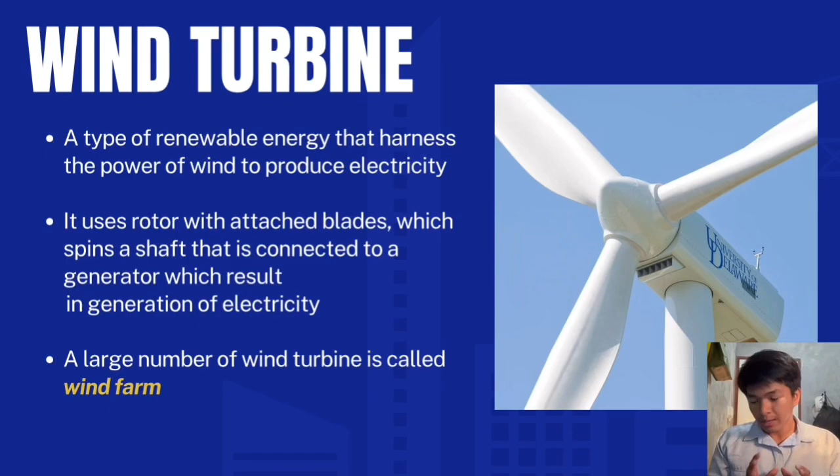When many wind turbines are installed in one area, it is called a wind farm. Wind farms are usually located in places with strong and consistent winds, such as coastal areas, yung mga offshore, mga mountain areas, and lalo na sa mga open plains. Kasi syempre, yung mga wind turbines, sobrang laki nun, kailangan dapat open space siya. Syempre, pag sobrang mas mataas, mas mahangin.

The blades are the most visible part of the wind turbine, yun nakikita natin sa harap, yung tatlong umiikot, tatlong blades. They rotate when the wind hits them. Kapag may hangin na dumaan, ang mga blades, magro-rotate siya clockwise. So the blades are connected to the hub.

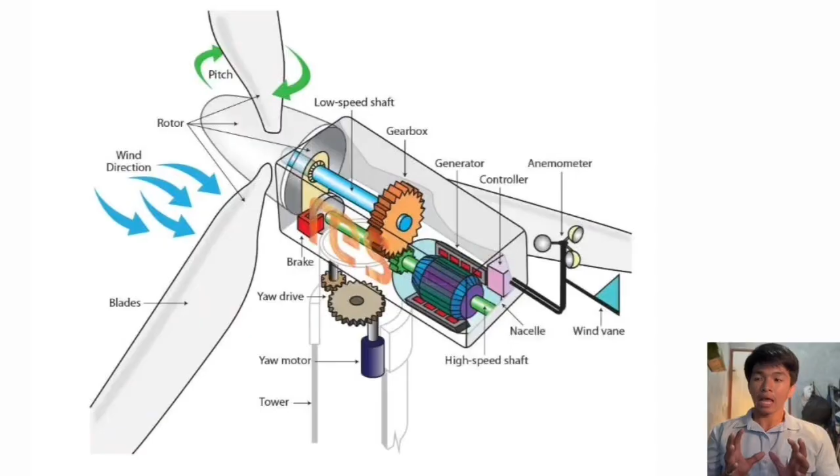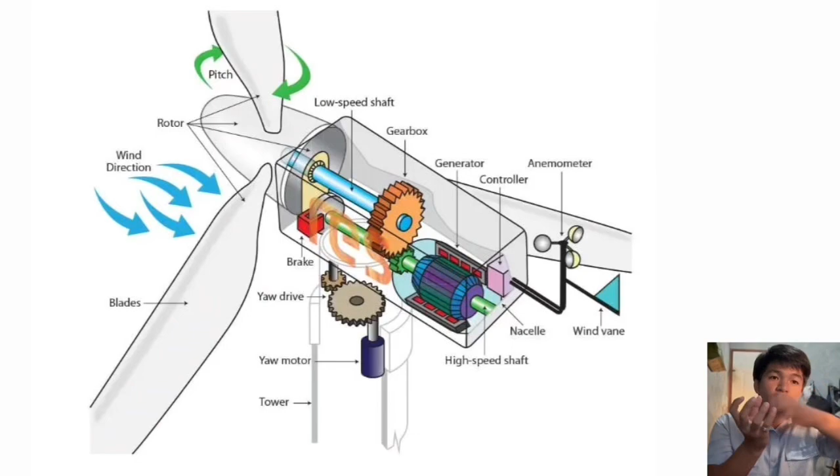The hub is connected to a low-speed shaft. Ang low-speed shaft, it connects to the gearbox, and the gearbox increases the rotational speed before sending it to the generator. Kaya mapapansin natin, kapag ang pag-ikot ng blades, mabagal, paano siya makapag-produce ng electricity kung ganun kabagal? So meron tayong gearbox, yun yung nagpapabilis ng rotation, tapos magkoconnect siya sa high-speed shaft, yun yung umiikot na mabilis, mapunta sa generator.

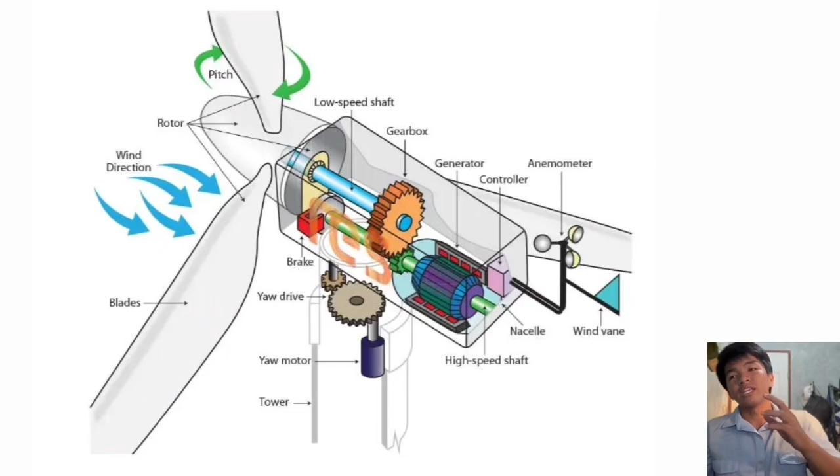Ngayon, yung generator, makapag-produce siya ng enough electricity na mapupunta sa kung saan ini-store yung electricity natin. Once the generator rotates, electricity is produced. Most modern wind turbines have 3 blades because this design is the ideal. Kasi kapag less than 3 or more than 3, magkakaroon siya ng faulty, hindi siya efficient. So ang 3 blades na design ay nagbibigay ng maximum efficiency and stability.

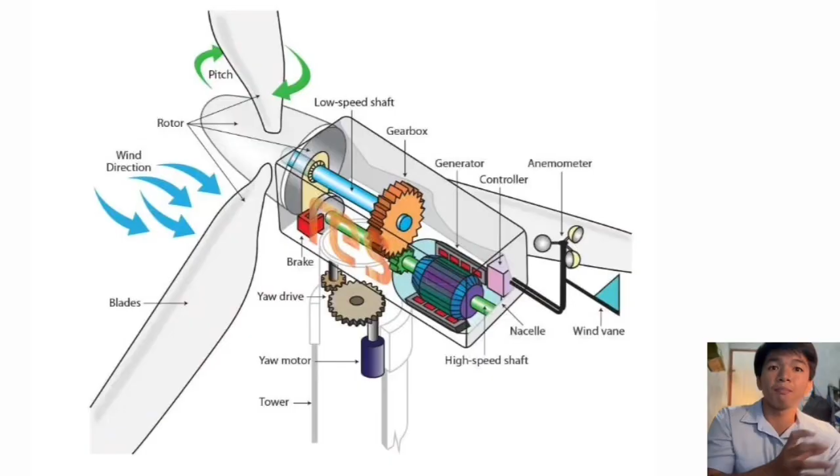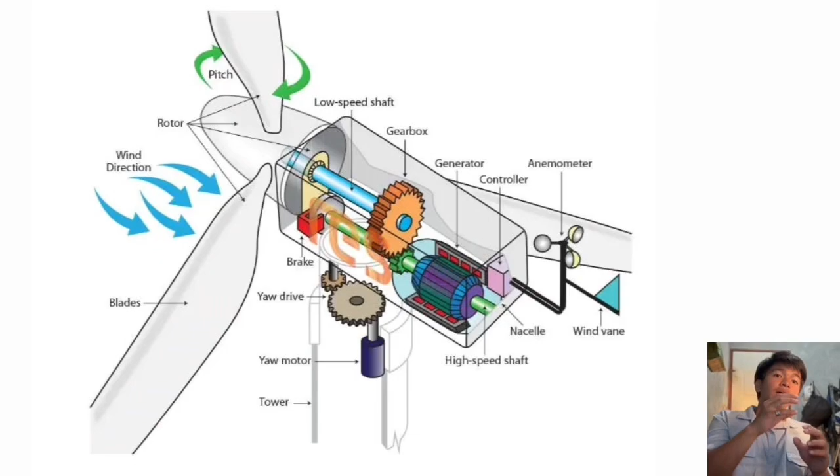So mamaya madidiscuss natin kung bakit 3 blades lang. Pangalawa, yung hub naman. Makikita natin dito, ang hub nagko-connect siya sa blades hanggang sa shaft. It transfers the rotational motion from the blades to the low-speed shaft, papunta sa gearbox.

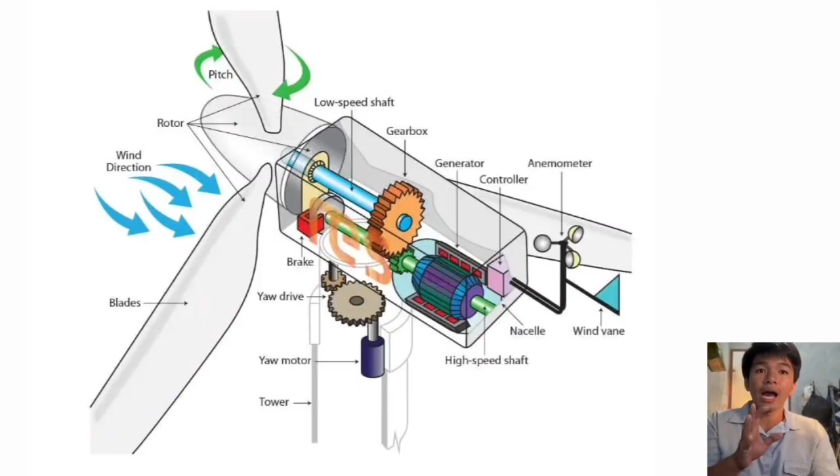Pangatlo is low-speed shaft. This shaft rotates slowly, usually around 10 to 30 revolutions per minute. It carries the mechanical energy from the blades to the gearbox. Alam nyo ba, sa isang ikot ng wind turbine blades, yung umiikot sa loob ng gearbox ay naka 90 na ikot. Isipin nyo kung gaano kabilis, kaya nakakapag-produce siya ng electricity dahil doon sa gearbox.

Ang gearbox naman, it increases the speed of rotation. Wind turbines need high rotational speed for the generator to produce electricity efficiently. Kasi kung mabagal yung pag-ikot, wala maproproduce na electricity. Kaya yun yung purpose ng gearbox, it increases the speed of the rotation para makapag-produce siya ng enough electricity.

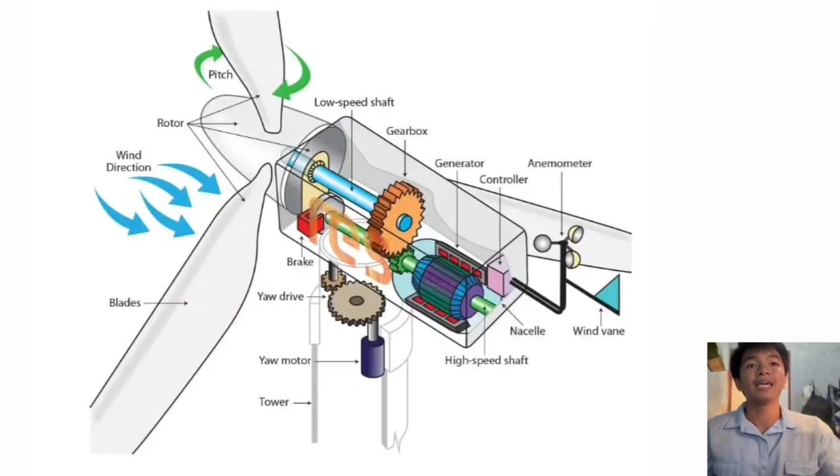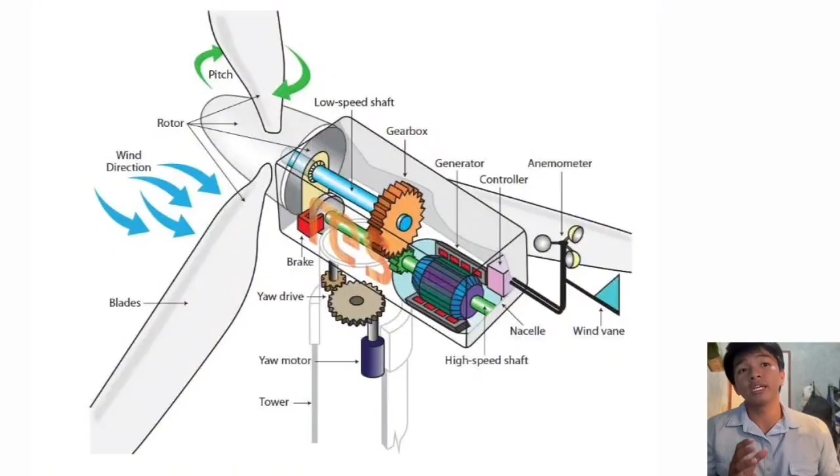Dadako naman tayo sa generator. Ito yung pinaka main component ng wind turbine, kasi kung wala yung generator, hindi siya makakapag-convert from mechanical energy into electrical energy, hindi siya makakapag-produce ng electricity. This is similar to how generator works in power plants.

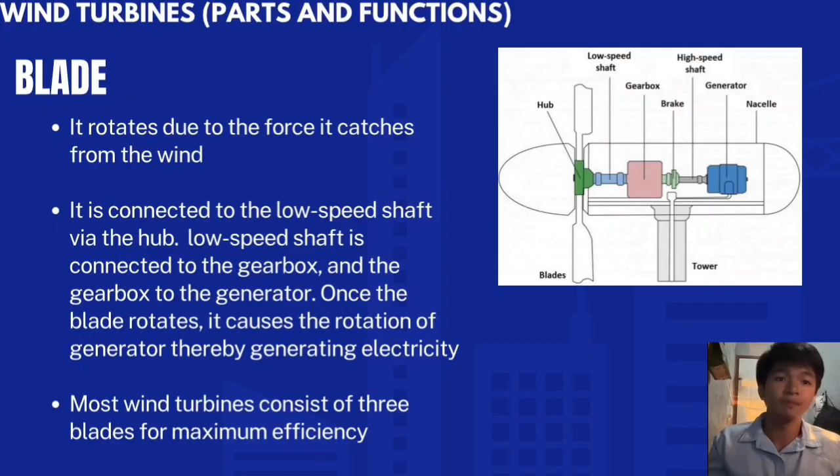Dito naman po, next ay the low speed shaft is connected to the gearbox and the gearbox is connected to the generator. Once the blade rotates, it causes the rotation of the generator, thereby generating electricity.

Basahin muna natin ang blade design. Una, it is to produce an amount of power, wind turbine blades generally need to be large and tall. Pangalawa, it is shaped to generate maximum power from the wind at the minimum cost. Pangatlo, improvements in the design has produced new wind turbines which are more compact, quieter, and generates more power from less wind.

Pang-apat, its length can vary around 50 meters to 107 meters. Currently, the longest is from Siemens Gamesa.

Wind turbines are very important sa atin. Wind turbine blades pala are very important because their design affects how much power the wind turbine can produce. Now, it is to generate more power. Ang wind turbine blades are generally large and tall.

Ngayon, tatandaan natin ito, i-take note natin, kapag mas malaki, mas mataas yung height, mas malaki yung maproproduce na power. Bakit kaya? Kasi mas mataas yung altitude, mas malakas yung hangin na matatanggap ng blades, which magiging more faster rotation dahil sa pressure na binibigay ng air.

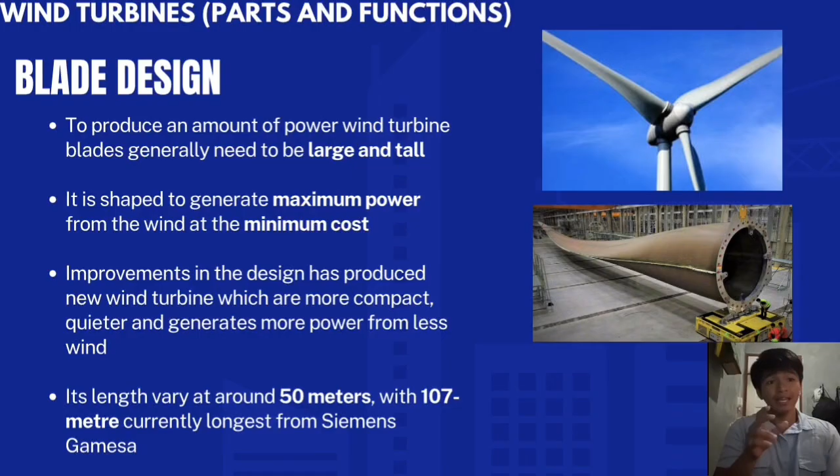Dadako naman tayo sa airfoil shape. Ang blade design nito, it is the cross-sectional shape of the blade that determines its aerodynamics. This airfoil design allows the blade tips of a wind turbine to move faster than the wind is moving, thus generating more power and higher efficiency.

Makikita natin dito sa slide na ito kung ano yung itsura ng airfoils. It is the cross-sectional shape ng blade, yung area mismo niya, yun yung tinatawag nating airfoil. The airfoil design allows the blade tips to move faster than the wind, which increases efficiency and power generation.

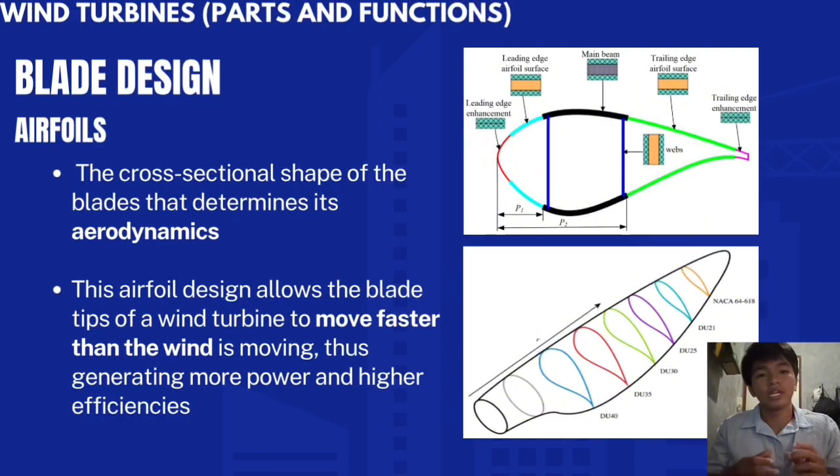Dito papasok na ang aerodynamics. Makikita natin dito yung mga each design, mga types ng design ng airfoils. Makikita natin, thick airfoil family for large blades and thin airfoil family for medium blades. Tingnan nyo na lang kung ano yung mga itsura ng mga designs ng ating mga wind blades.

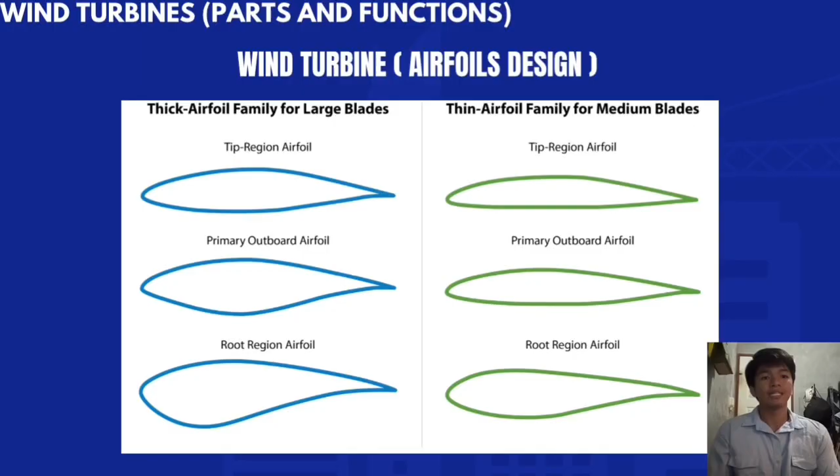Blade aerodynamics. Wind turbine blades work by generating two aerodynamic forces, the lift and drag. This is due to the wind and their airfoils. Ang explain ko na lang sa inyo, ang lift force is perpendicular siya sa air, kumbaga pataas siya.

Yung air, pataas siya. Ngayon, it is in line with the blade rotation. Kapag kung saan umiikot yung blade, doon ang lift force. Kaya nga yung lift force, umaangat siya. Ngayon, yung drag force naman, yun yung nasa ilalim, yun yung parang dinradrag niya yung blade pataas.

It is in line with the apparent wind direction, which is in opposition of the blade's motion, and the drag increases in proportion to the frontal area of an object facing the wind.

So i-explain ulit natin. Ano muna ang lift force? Ang lift force nga raw ang nagpapaangat. It is perpendicular nga sa wind direction kung saan umiikot ang blade, or ito ang force na nagpapaikot sa blade, nagpapaangat.

So ang drag force naman is parallel to the wind direction. Yun yung nagdradrag, and it opposes the motion of the blade. Ngayon may tip ako sa inyo, kung kayo sa wind turbines, the more lift na na-increase siya, mas maganda yung magiging resulta.

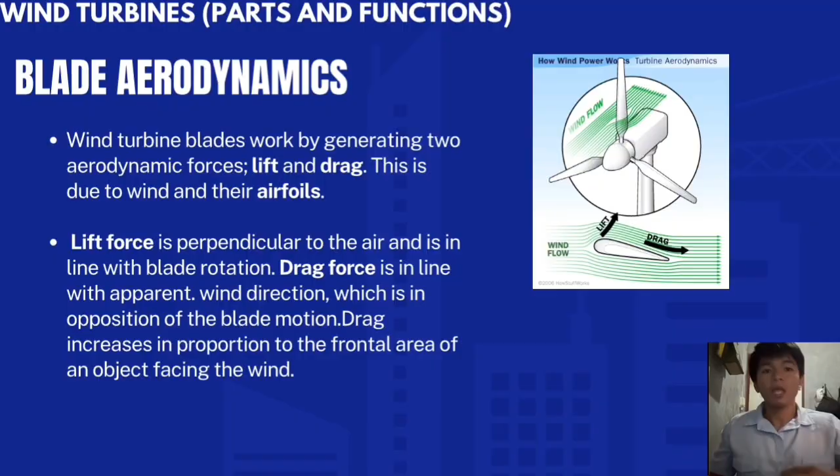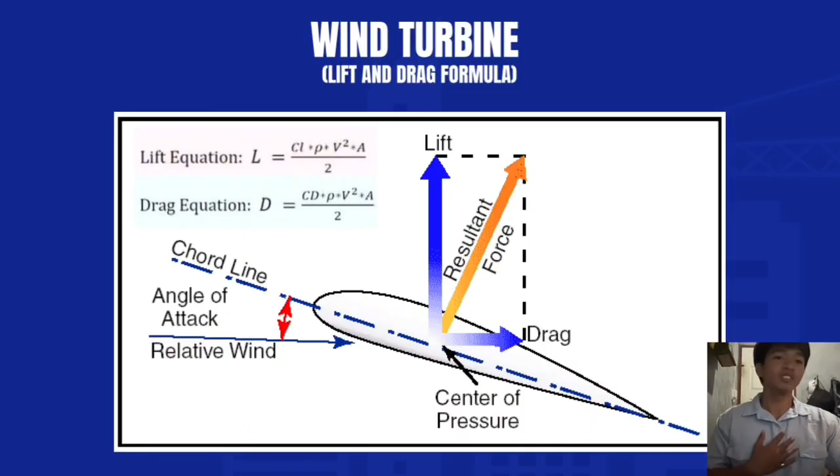So these formulas can help future engineers to design blades that produce maximum energy. So makikita dito natin sa slide na to, the blade aerodynamics. So ayun nga, may makikita kayong pa-curve and sa pataas na ganon. So may tinatawag tayong ganon sa aerodynamics.

So another thing that the airfoil or the design is able to bring is for the blade to attain a difference in pressure. Makikita natin in both sides. May pagkakaibang pressure kasi magkaiba yung curve nila.

So may tip lang ako sa inyo dito. Kung ano ang mas ma-curve, yun yung low pressure. Kung ano ang less curve na area, yun yung high pressure. Yun yung nagli-lift na force, paangat. So the difference in pressure on both sides.

So the most curved side nga, or we say the convex side, generates low air pressure, while the high pressure air pushes on the less curved side, or the side that is slightly concave part, or paganire, this is actually the reason kung bakit nagro-rotate yung blades natin, kung bakit nagkakaroon ng conversion ng electricity. So makikita natin yung pressure difference nila.

Kaya para mag-rotate ang isang blade pala, kailangan pala yung magkaiba yung curve nila para magkaiba yung pressure nila. So para mag-rotate yung blades natin para magkaroon ng electricity, para magkaroon ng maximum efficiency nga. So that's how, alam nyo ba, yung mga aeroplano, ganun din. Paano siya gumagana? That's how airplanes work. So ayun lang ang ating madiscuss.

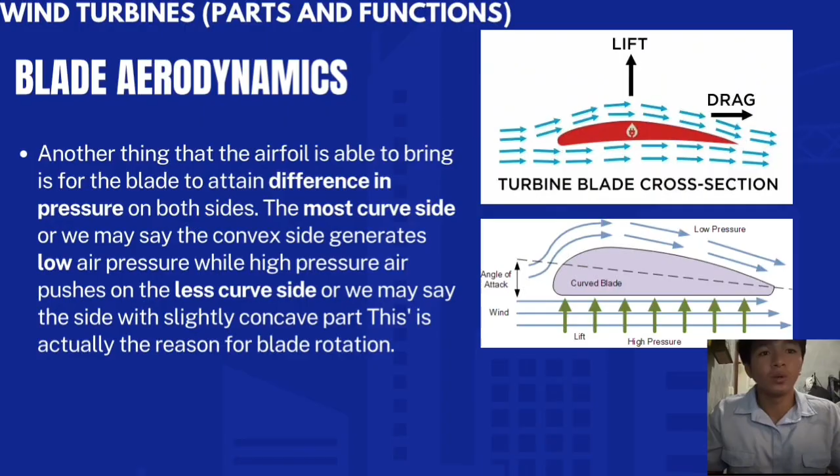Dito ipinapakita ang role ng leading edge and trailing edge sa kung papaano ito nakakatulong sa pag-ikot ng blades. So ang una ay ang leading edge. The leading edge is the front part of the blade. Kumbaga, ito yung may direct contact sa air, kung saan ang air ang nagpupush dito upang umikot ang isang blade. And also, it plays an important role in guiding the airflow smoothly over the surface of the blade.

And next naman is the trailing edge, kung saan ito ang rear portion of the blade where the airflow exits after passing over the blade.

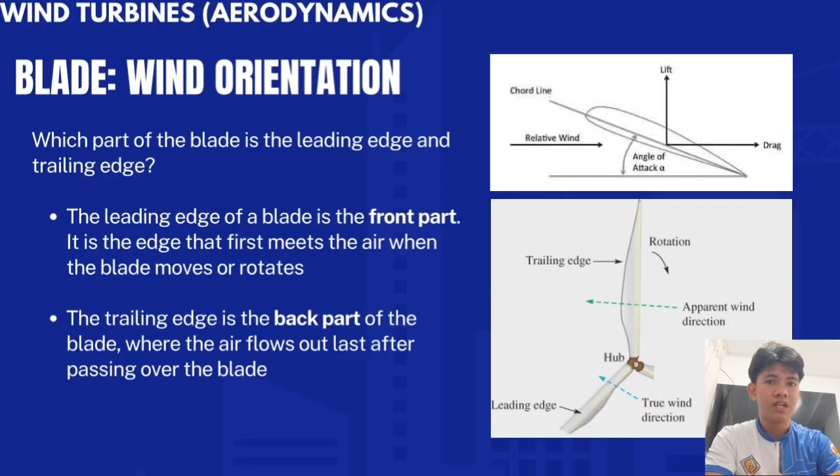Its shape helps control how the air leaves the blade, which affects efficiency and overall performance. So dito ipapakita kung ano nga ba ang rotation ng isang wind turbine. Tinutulak ba siya sa part na may mas maliit ang curve or sa part na may mas malaking curve? So, ang rotation ng blade ay patungo sa kung saan may mas maliit ang curve.

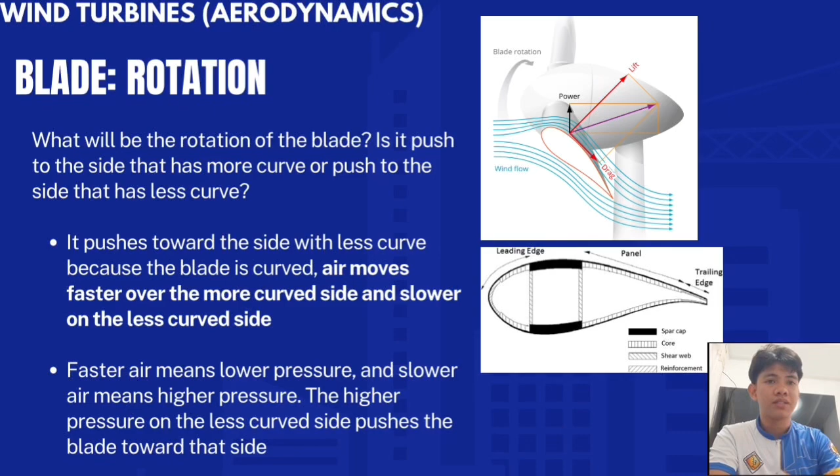This happens because the blades is shaped with one side more curved than the other side. Air moves faster over the more curved side, creating lower pressure, while air moves slower on the less curved side, creating high pressure. And yung pressure difference na yung nagpo-produce ng lift, which causes the blade to rotate patungo sa side na may less curve. So, kung ating titingnan sa front view, makikita natin dito na pa-clockwise ang rotation ng wind turbine.

Additionally, the blade's design is twisted and tapered along its length to improve aerodynamics. The twisting adjusts the angle of attack at different points of the blade, optimizing airflow and increasing lift. The tapering reduces the blade's thickness towards the tip, which helps reduce the drag.

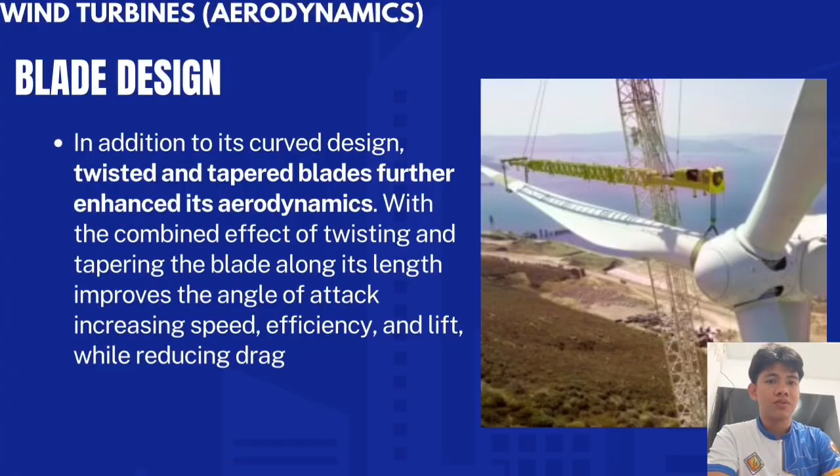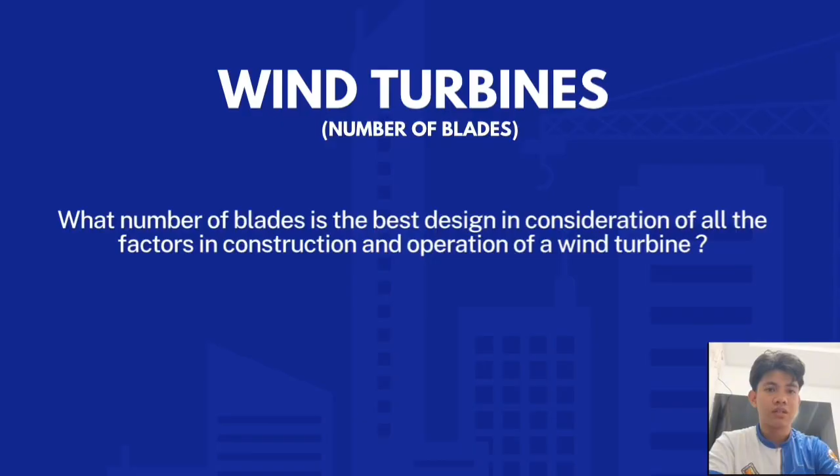So, let's proceed naman po dito sa kung ano nga bang dami ng blade ang mas maganda. Isa ba, dalawa, or tatlong blades, or mas marami pang blades ang mas maganda sa pag-operate ng isang wind turbine? Sabi dito, the fewer the blades, the better. Kapag mas kaunti ang blades, mas mababa ang drag dahil mas kaunti ang surface area na humaharang sa airflow habang umiikot ang blades. Dahil dito, mas mabilis ang pag-ikot ng turbine.

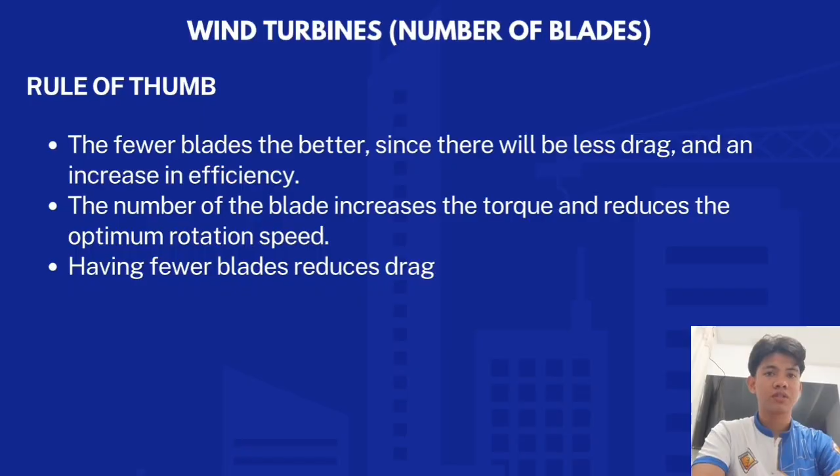However, fewer blades also produce less torque, which means the turbine generates less twisting force. Kapag marami naman ang blades, tumataas ang torque, pero dumadami ang drag. Kaya bumabagal ang pag-ikot at maaaring bumaba ang efficiency. Kaya pinagbabalanse ng mga designer ang bilang ng blades to optimize both torque and rotation speed for the best performance.

While having only one blade would reduce the drag and potentially maximize energy captured because there's less resistance, it creates a serious problem: the turbine becomes unbalanced. With just one blade, the forces acting on the turbine are uneven, causing vibrations and mechanical stress. Kaya kahit may advantage sa drag, kasi nga sabi, because the fewer blades, the lesser drag, hindi pa rin practical ang paggamit ng isang blade dahil kinakailangan nito ng matibay at matatag na turbine habang umiikot. Kaya mas pinipili ng designer na gumamit ng mas maraming blade para sa balance.

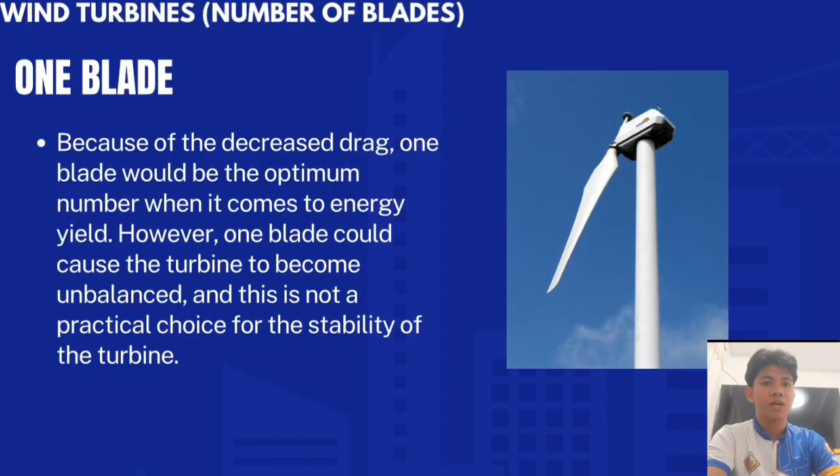At yun, example is 3 blades, di ba, na may maintain nito yung balance and na-ensure yung smooth and reliable performance. So, dito sa 2 blades, masasabi natin na balance ito.

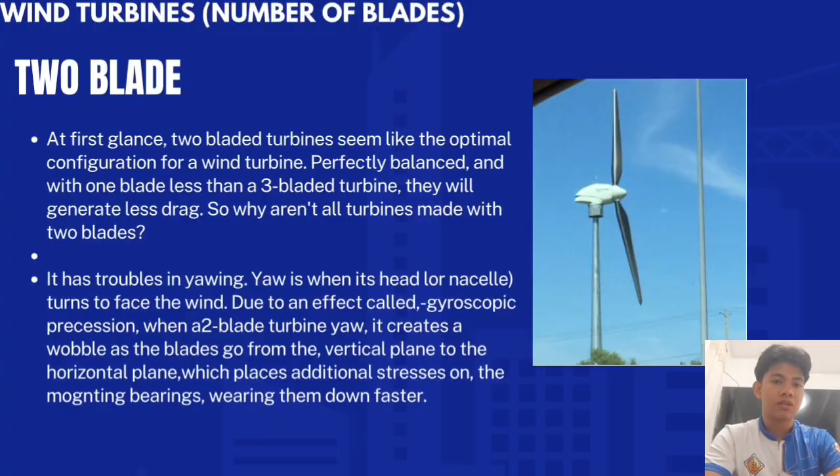Pero dito, nagiging problema ay ang yawing. Ano nga ba ang yawing? Ang yawing ay ang pag-ikot ng nacelle para ito ay tumututok sa direction ng hangin. At ito ay tinatawag din na gyroscopic precession, na kapag ang dalawang blade ay nag-yaw, nagkakaroon ng panginginig, at ito yung nagdudulot, nagiging sanhi ng stress sa bearing. Kaya ito rin yung nagkakausa ng mabilis na pagkasira ng isang turbine. Kaya hindi rin ito recommended ng mga designer.

Having more than 3 blades increases the total surface area that pushes against the wind, which causes greater wind resistance. This extra drag slows down the turbine's rotation, reducing the efficiency of electricity generation. So kumbaga, pag mas maraming blades na nakalagay sa isang turbine, mas napapabagal nito yung pag-ikot ng turbine, dahil na rin sa malaking area na pwedeng pagtulakan ng hangin.

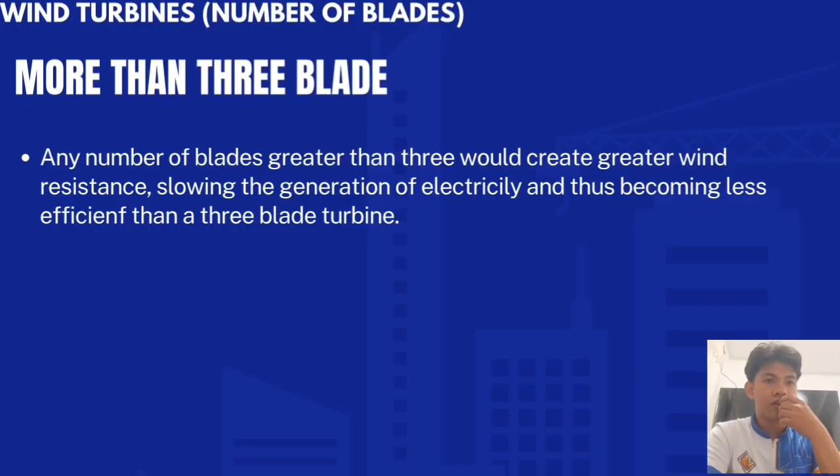So 3 blades strike the best balance because they provide enough surface area to capture wind energy efficiently while keeping drag low enough to maintain a good rotational speed. This combination results in smooth operation, stable balance, and optimal power output, making three blades the most efficient and practical choice for large wind turbines.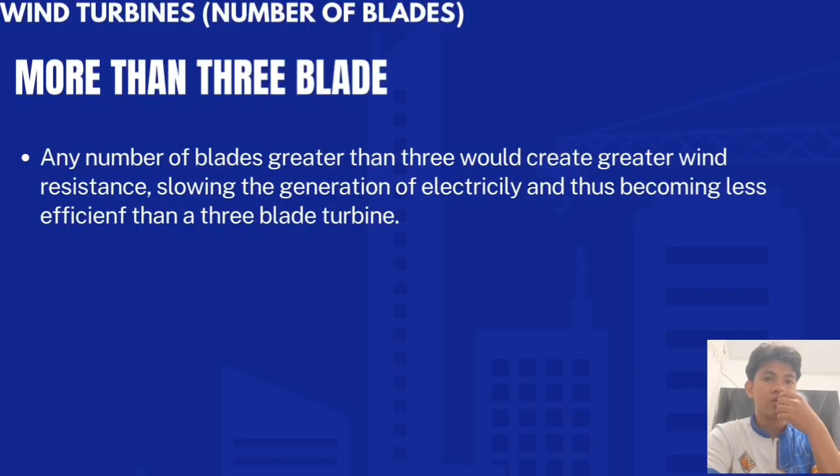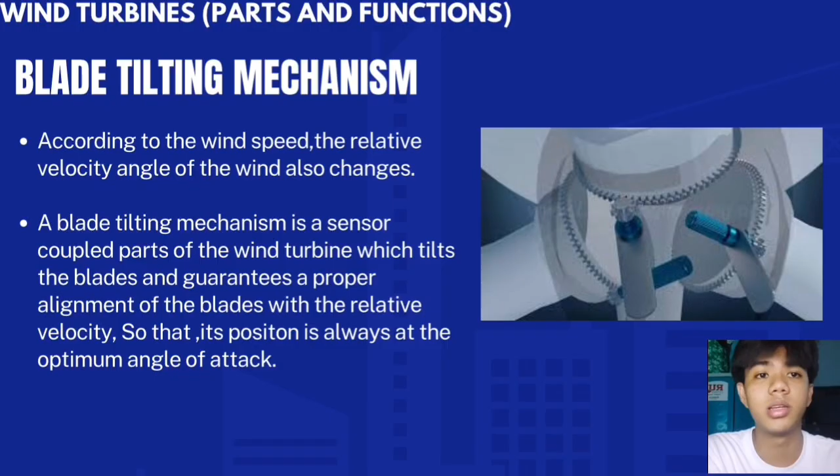Ang susunod na parts ng wind turbines ay yung nacelle. Base dito sa picture, makikita nyo yung nacelle sa may likod ng blade, yung may nakasulat na Siemens. Minsan ito ay tinatawag na housing, kasi nagko-contain ito ng mga slow speed shaft, high speed shaft, gearbox, generator, at mga iba pang maliliit na parts sa loob nito.

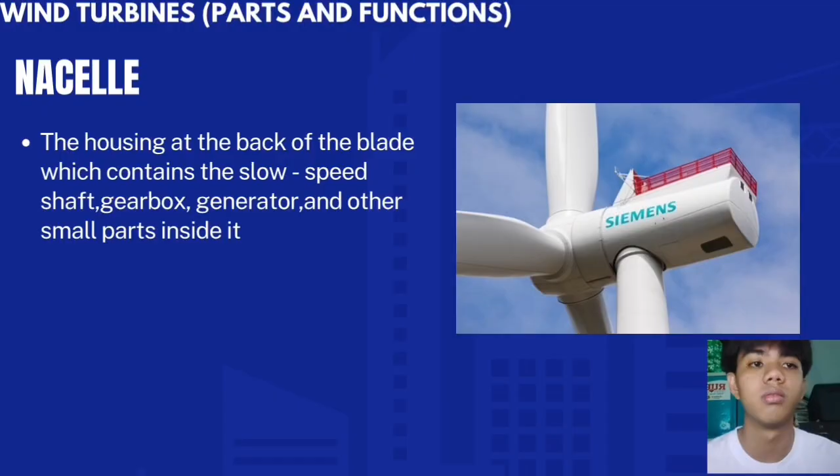Next naman ay yung gearbox. Ano nga ba yung function nito? Ang gearbox ang nagpapabilis sa mabagal na pag-ikot ng wind turbine tungo sa mas mataas na bilis na kailangan ng isang generator para makapag-produce ito ng kuryente. Sa pamamagitan ng mga gears, pinapataas ang RPM mula sa low speed shaft patungo sa high speed shaft ng generator. Dahil doon, ang generator ay umiikot sa tamang bilis at nakakapag-produce ito ng electricity.

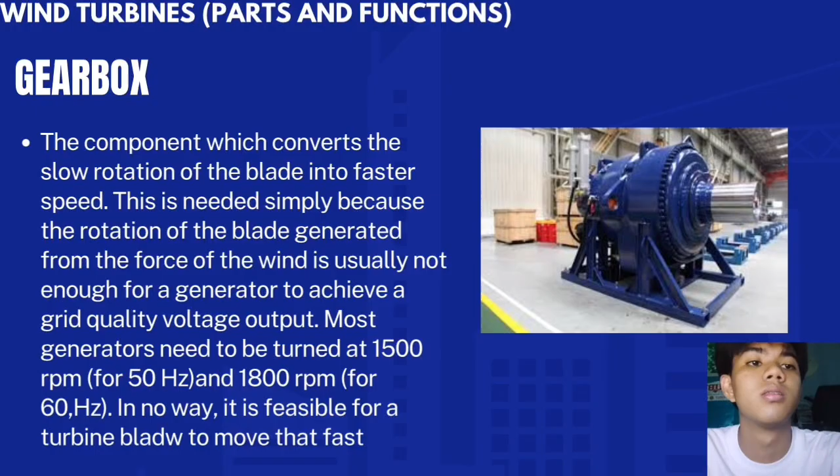Ang common ratio ng isang gearbox ay about 90:1 with a rate of 16.7 RPM input from the rotor to 1,500 output RPM for the generator. Ang ibig sabihin ng ratio na 90:1, sa kada isang ikot ng blade, 90 beses ang ikot ng isang gearbox.

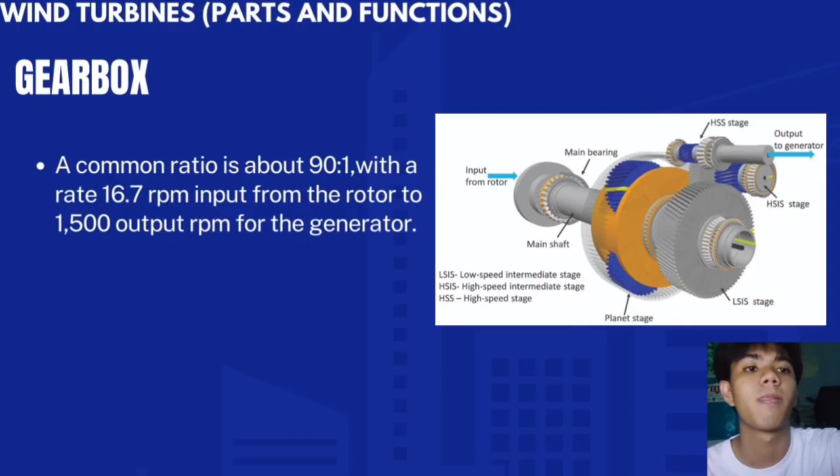Ngayon proceed tayo sa alternative design ng wind turbines, tinatawag na direct drive o gearless. Ano nga ba ito? Unlike sa mga lumang turbine, wala na itong gearbox. Dito sa gearless, yung main shaft ay diretso nang nakakabit sa generator, kaya kung gaano kabilis umikot yung blade sa labas, ganoon din kabilis yung ikot sa loob.

Ang tawag sa ganitong generator ay PMDD, o Permanent Magnet Direct Drive. Bakit nga ba ito mas okay? Kasi pag less sa moving parts, less din yung sakit sa ulo. Dahil mabagal lang ang rotation at walang gears na nakikiskisan, mababawasan yung stress at fatigue sa makina. Resulta, tahimik siya at mas tumatagal ang buhay ng turbine. Isa pang maganda dito ay mas mababa ang cost of maintenance niya, dahil hindi na natin kailangan gumastos ng malaki sa repair kasi walang gearbox na madalas nasisira.

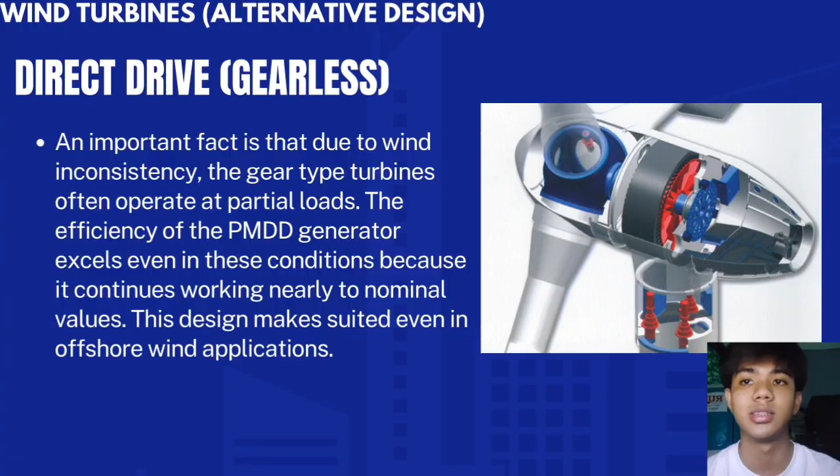Kung may advantages, syempre may disadvantages din itong direct drive. Ang main issue rito ay dahil mabagal ang ikot niya, kailangan natin magdagdag ng mas maraming magnets para ma-produce yung tamang frequency at power. Resulta, lumalaki ang diameter ng generator kaya nagiging mas malaki at mas mabigat ito kumpara sa may gearbox. Makikita niyo sa picture kung gaano siya kalaki.

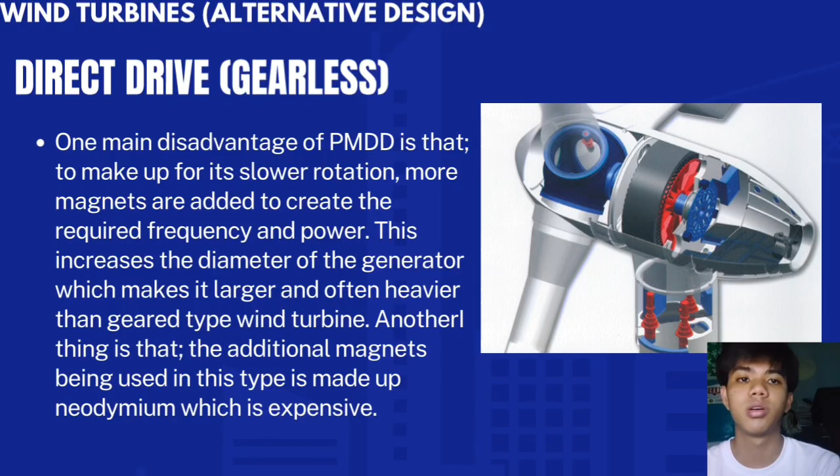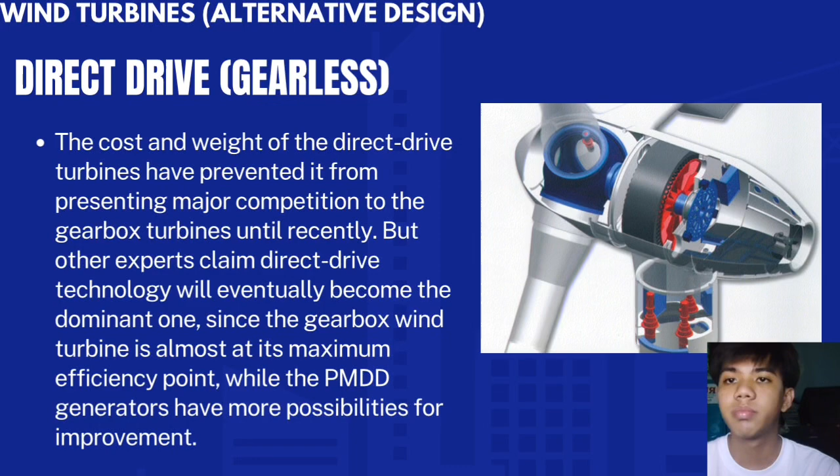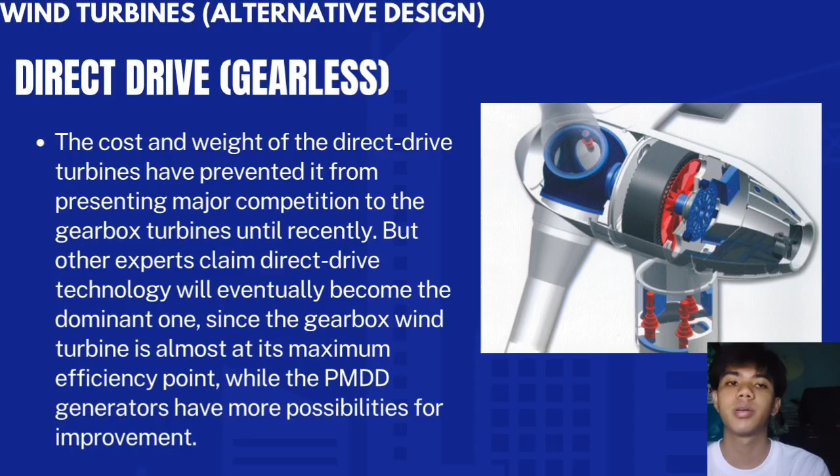Isa pang downside nito ay yung materyales. Yung mga magnets na dinadagdag natin ay gawa sa neodymium, itong element na ito ay expensive o sobrang mahal. Dahil sa bigat at mahal na presyo, hindi masyadong ginagamit itong direct drive. Pero naniniwala ang mga expert na ito ang magiging dominant technology sa future, kasi ang gearbox turbines ay sagad na ang improvement, habang ang PMDD generators ay marami pang pwedeng improve, at kapag na-achieve nito ang full potential ay mas maganda pa ito sa gear type generator.

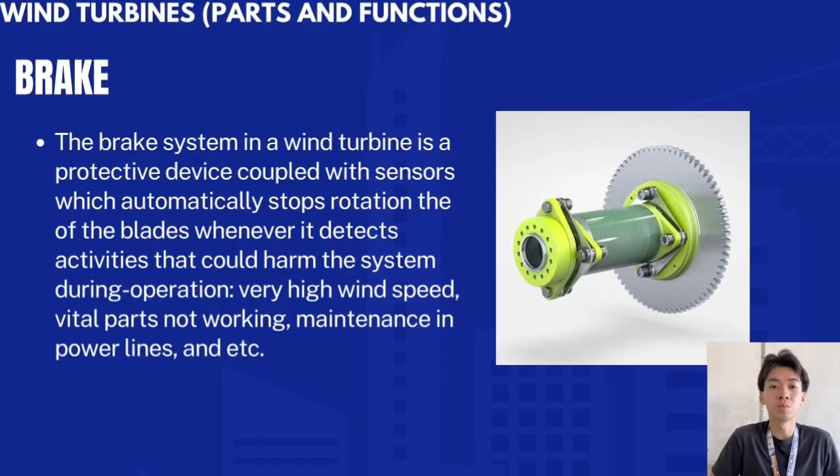Ang susunod naman ay brake. Ano ba ang brake? Ito yung nagsisilbing protective device para hindi masira yung buong unit. May mga built-in sensors ito na automatic nagpapahinto sa mga blades kapag nakaka-detect ng masyadong malakas na hangin. Importante ito para maiwasan ang mechanical failure o overloading. Bukod sa safety, ginagamit din ito kapag may maintenance na kailangan, kailangan nakahinto yung rotation ng mga blades. Sa madaling salita, ang brake ang sumisiguro na laging under control ang turbine.

Yaw system. Ang yaw system ang responsible sa pag-align ng turbine sa hangin. Binubuo ito ng yaw motor at ng yaw drives na automatic na nagpapaikot sa nacelle sa tower. Para malaman yung tamang direction, kumukuha ang system ng data mula sa wind vane na nasa likod ng turbine, sinisigurado nito na ang mga blades ay laging nakaharap sa hangin. Importante ito dahil ito yung dahilan kung bakit nakakapag-produce ang turbine ng maximum amount of electricity.

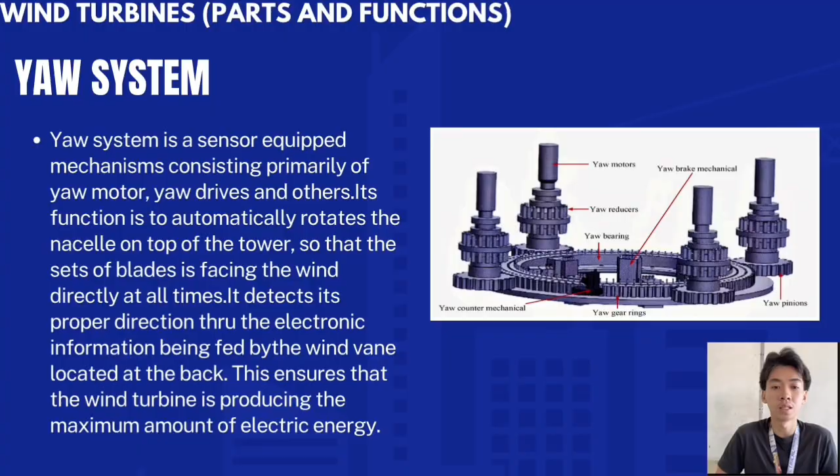Tower. Ito yung pinaka-structure ng turbine dahil dito nakapatong yung ibang parts ng turbine. Ang usual height nito ay 75 to 110 meters, at nakadepende ito kung gaano kahaba yung blades ng turbine. Mas mataas, mas malakas ang hangin, kaya mas makakapag-generate ng mataas na energy.

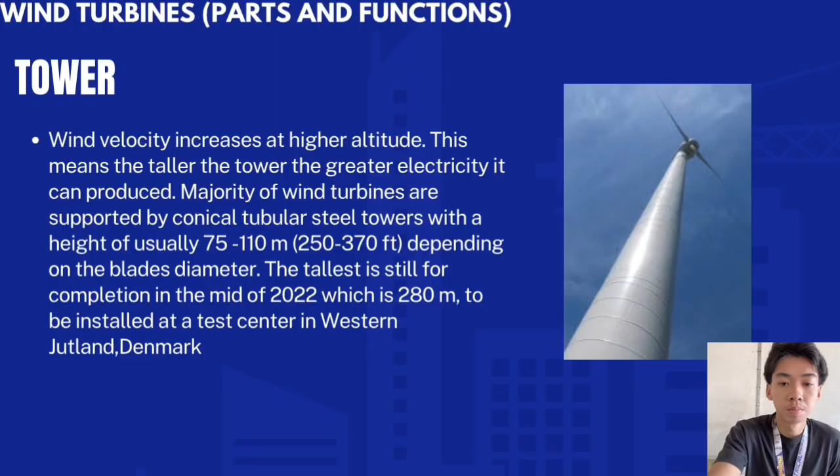So ngayon po, i-explain ko naman ang tower height and blade diameter ratio. Kung mapapansin nyo po, noong year 2000, ang average height ay 58 and ang rotor diameter ay 48. Fast forward po tayo sa 2018, ang naging average hub height ay 88 and ang average rotor diameter ay 116, naka-meters po ito. Mapapansin nyo po, habang tumatagal ang panahon, mas tumataas yung height and mas humahaba yung diameter.

Parang interconnected po sila. Habang mas mataas po yung height, mas nakakapag-generate po ito ng mas large amount of energy dahil mas malakas po yung hangin.

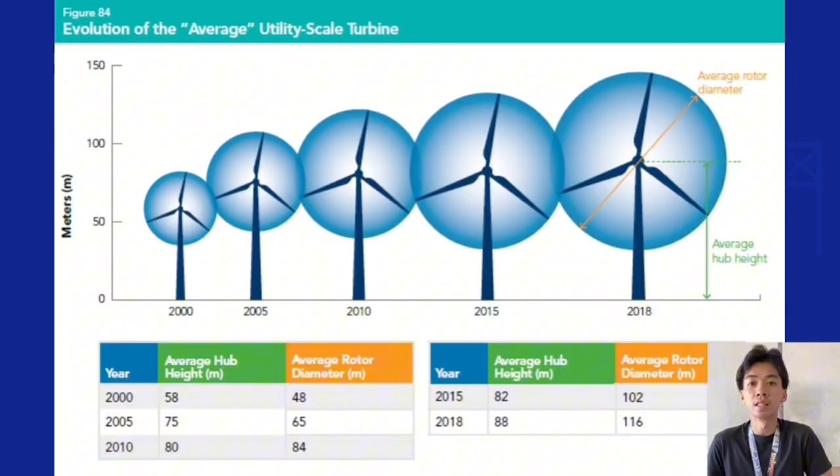Saan po ba dapat magtayo ng mga wind turbines? Ang pinakamaganda pong pagtayuan ng wind turbines ay sa mga coastal areas o kaya naman ay sa mga bundok dahil malalakas yung hangin dito. Kailangan po ang average speed ng wind ay maabot sa 25 kilometers per hour.

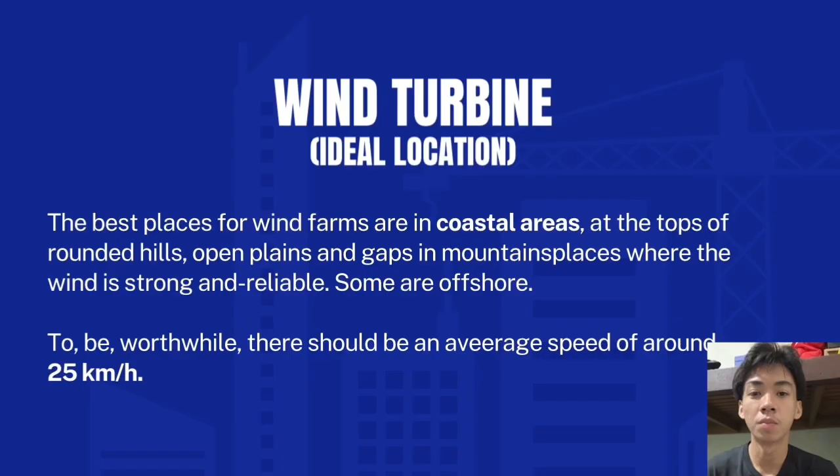Advantages and disadvantages of wind turbine. Ang unang advantage po is wind is free. Libre po yung hangin, hindi na po kailangan gumasta. Magpunta lang po kayo sa tabing dagat o sa mga bundok, malalakas na po yung hangin doon.

Ang pangalawa naman po is produces no waste or greenhouse gases. Ang wind po kasi is renewable energy, so hindi po siya bad sa environment.

Ang pangatlo naman po, the land beneath can usually still be used for farming. Maaari pa rin po magamit yung land na tinatayuan nitong wind turbines.

Ang next naman po is a good method of supplying energy to remote areas. Maganda po ito para masuplayan yung mga liblib na lugar o yung mga lugar na malayo sa syudad.

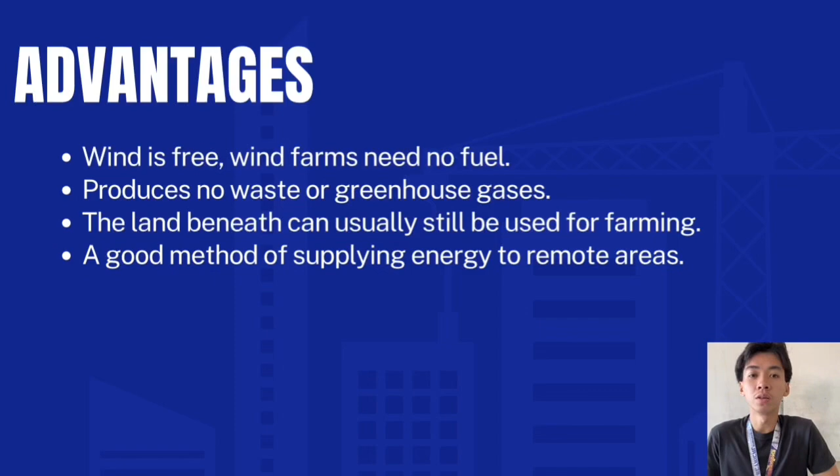Ang disadvantages naman po, ang una is the wind is unpredictable. Yung lakas po kasi ng hangin, nakadepende po ito sa season o sa oras.

Ang pangalawa naman po, suitable areas for wind farms are often near the coastal area where land is expensive. Mas mahal po kasi yung presyo ng lupa sa mga coastal areas.

At ang huli naman po, it can affect television reception on nearby places. Maaari po itong magkaroon ng interference sa mga television reception.

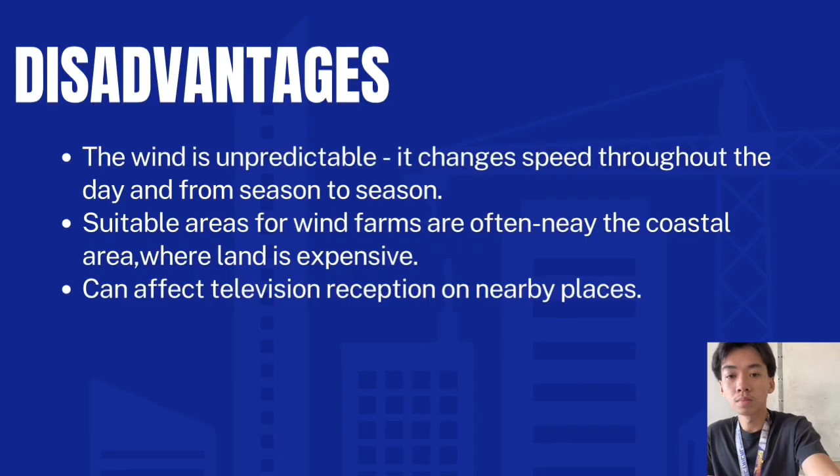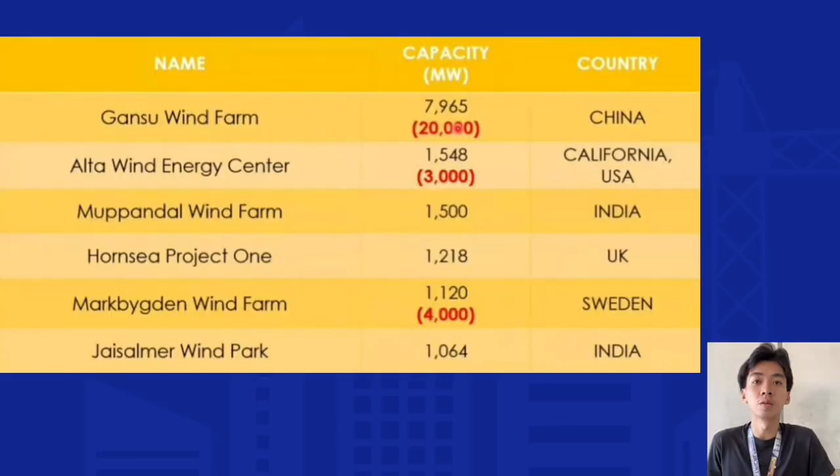Ang Gansu Wind Farm project sa China, ito po ang pinakamalaking wind farm sa buong mundo. Sinimulan po itong itayo noong 2009. Sa sobrang laki po nito, mahigit 20 developers po yung nagtulungan para sa construction nito and may estimated cost na $17.5 billion. Meron po itong mahigit na 3,500 wind turbines na may capacity na umaabot sa 5,160 megawatts.

Gumagamit po ito ng 750 kilovolts na AC power line para i-distribute yung nakukuhang kuryente mula sa wind farm. Ito po yung nagpapatunay kung gaano kalaki po yung investment na nilaan ng China para sa project na ito.

Ang next naman po is ang Burgos Wind Farm, ito po ay located sa Ilocos Norte. Ito po ang pinakamalaking wind power project o wind power farm sa Southeast Asia na may kapasidad po na 150 megawatts. Natapos po ang construction nito noong 2015 and may estimated cost na $450 million. Tinayo po ito sa 600 hectares na site.

Ang pasilidad po na to ay binubuo ng 50 wind turbines kung saan ang bawat isa ay may kakayahan na mag-generate ng 3 megawatts para sa Luzon grid. Ito po ay nakapatong sa isang tower na may 75 meter hub height and 90 meters rotor diameter.

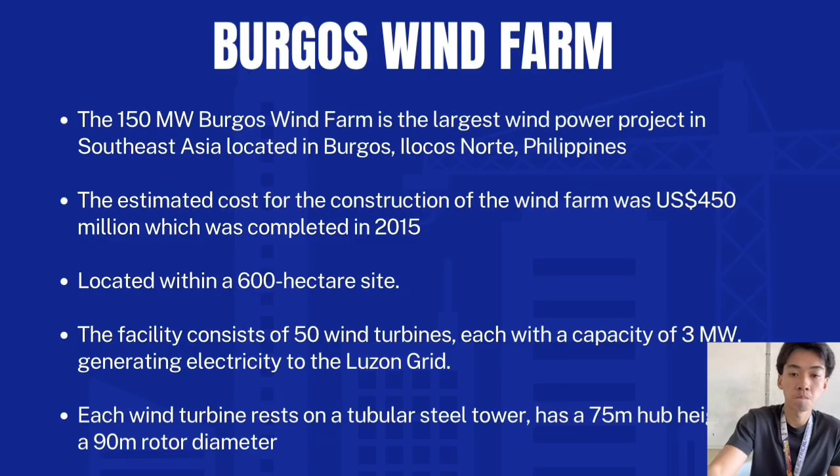I-explain ko naman po kung paano nag-ooperate ang wind turbine. Ang una pong mangyayari is, yung hangin, papaikutin niya yung rotor blade. Then, yung rotor blade po, papaikutin niya yung mga shaft. And yung purpose po ng gearbox is para mas bumilis yung ikot.

Dahil yung pag-ikot po kasi ng blade na to, mabagal lang po ito and hindi po ito enough para makapag-generate ng mataas na energy. So, papabilisin po ito ng gearbox, then dadaan po ito sa generator para ma-convert into electrical energy.

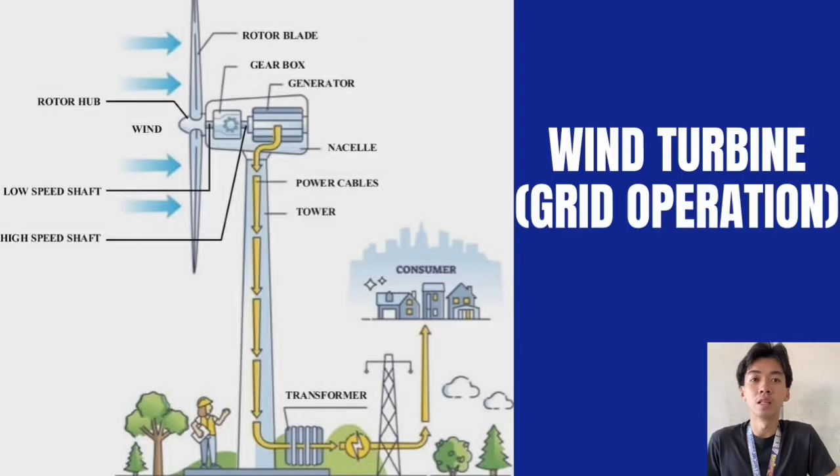Then, ang next naman po, dadaan po ito sa power cables, yung kuryente. Then, dadaan po sa transformer para i-step up yung voltage. Dahil malayo po yung lalakbay ng kuryente na to, so kailangan pong itaas yung voltage. Then, itatransmit na po ito.